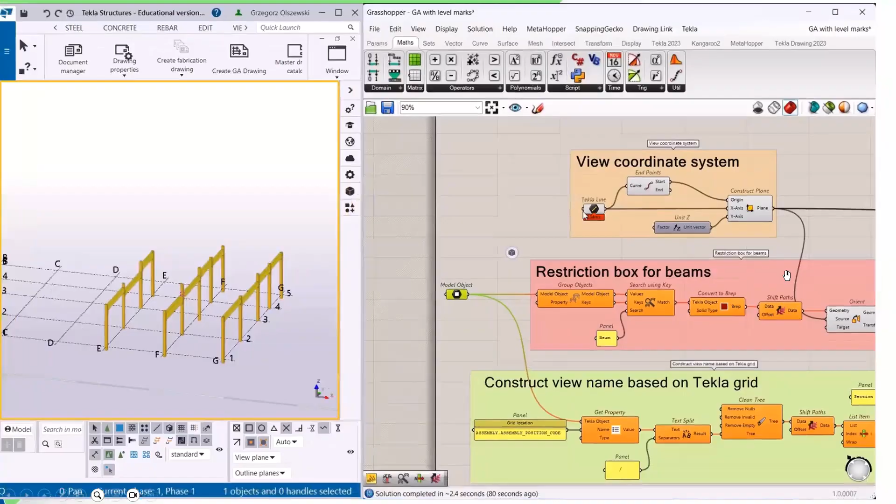Grasshopper is visual programming. When you think about programming, maybe you've heard of Python or C#. In text-based programming, you write text, your functions, and you can automate things. With visual programming, and Grasshopper is one such language, you use blocks. On the right side you can see these blocks, which are components, created by someone else, so you don't have to write anything in Grasshopper. What you can and should do is connect components to other components.

Some components have inputs. For example, at the top you connect the Tekla line, and next you connect a component called Endpoints. By connecting that you get start and end points. If you'd like to construct a plane, same as in Tekla, you connect an origin, an x-axis, and a y-axis. This is visual programming: step by step, through geometry, you create and automate, in this case, your drawing.

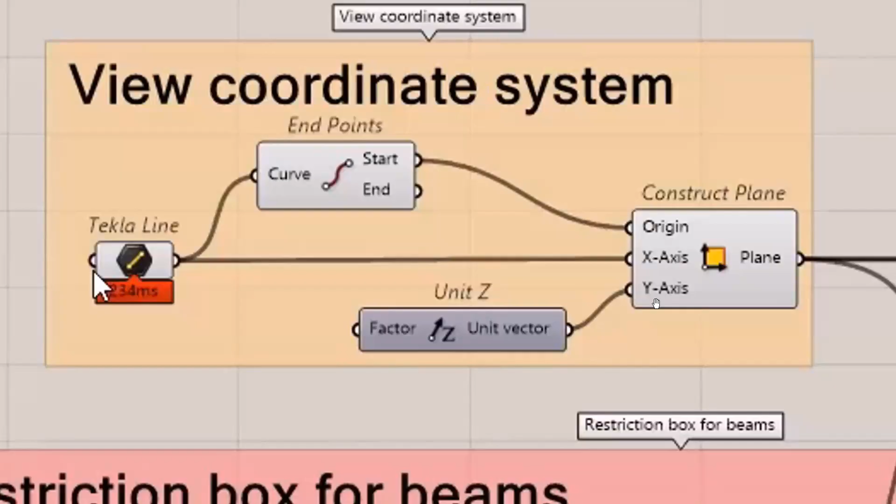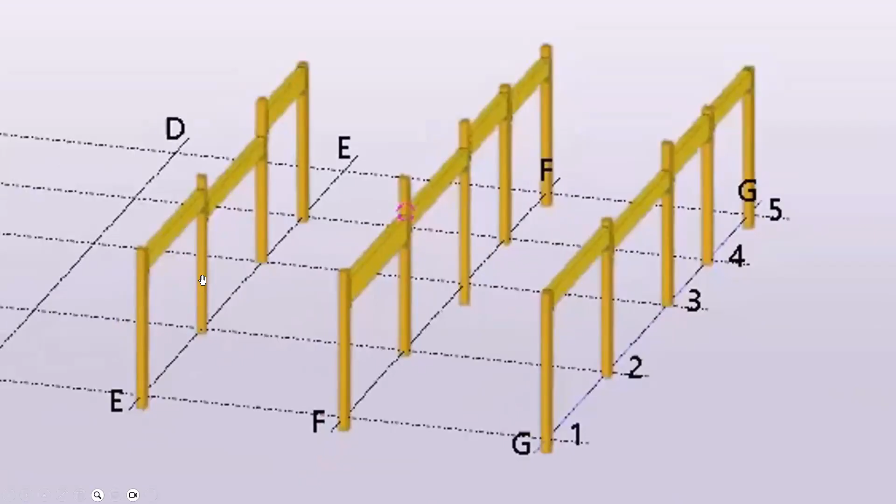Let's say we would like to automate production of drawings, like a cross-section view of every single frame. In this frame we have some beams and columns, so let's create 3 cross-sections. I've created a script here: from the script we set multiple model objects, choosing objects we'd like to include on our drawing, and nothing complicated, our drawing just pops up.

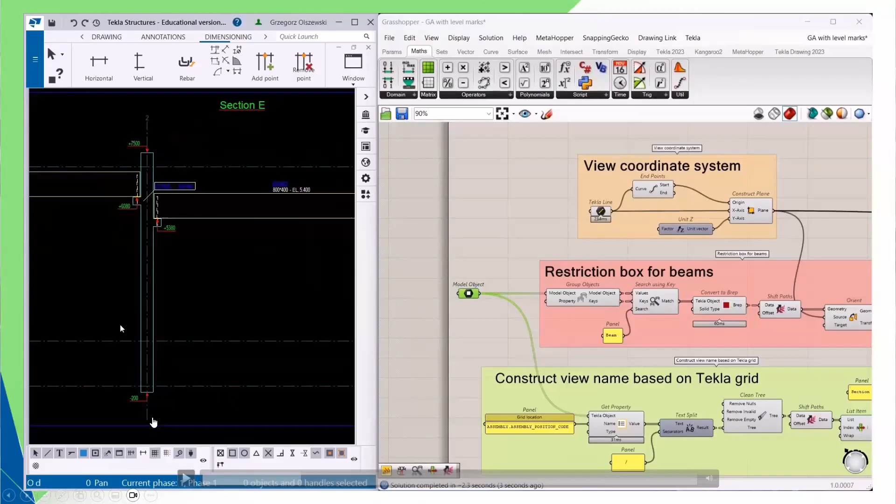In addition to the standard automation of our cross-section view, we've also introduced top marks on the column, our console, and bottom marks. We also make standard names for the elements. On the right side you can see Grasshopper and Tekla connected, as if open together, there's already a link.

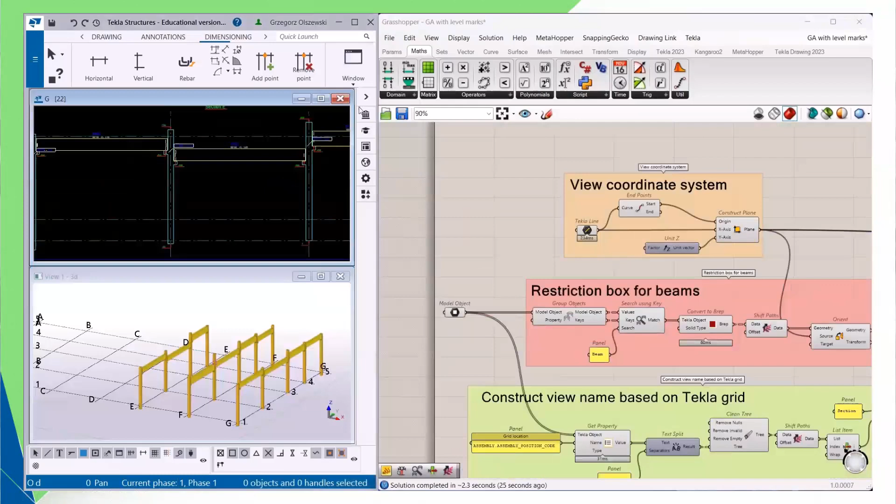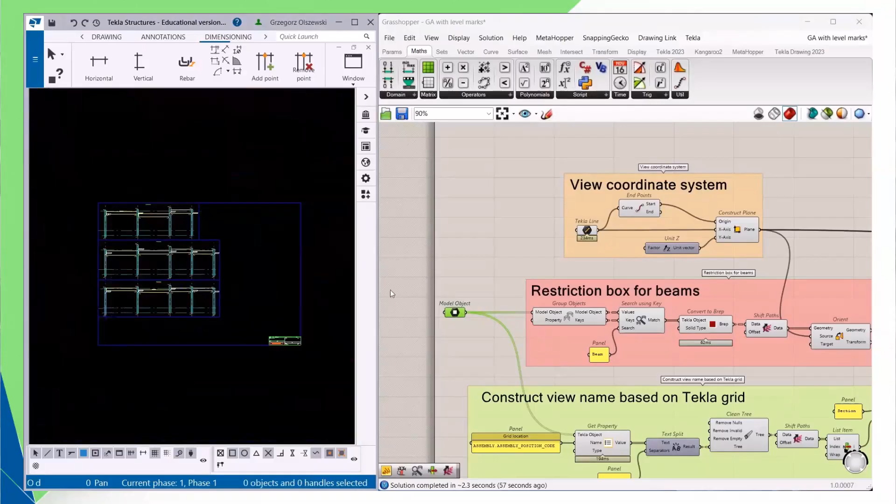What's best is that we can reuse this script, and this is what's great about Grasshopper. We can just select our second frame and the same automation comes: we get the section of the drawing, but also all the top marks automatically, all the names, and we can also make more things like dimensions.

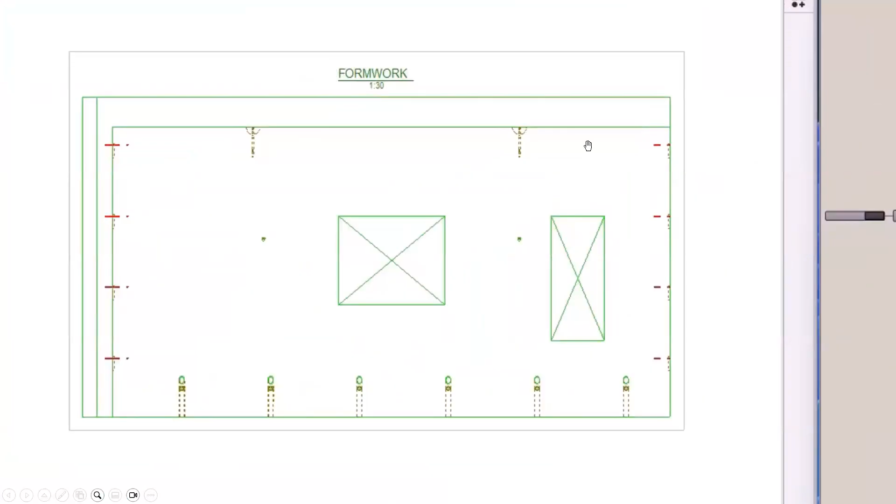Speaking of dimensions, when I worked at Consolis in Norway, a prefab company delivering prefab elements, we did a lot of this kind of drawing, and it was a real nightmare for me. Previously we did everything in AutoCAD, making all the dimension lines manually, all the doors, windows, lifting anchors, anchors on the sides, everything done manually. And in Tekla it's not that great to recognize with the dimensions.

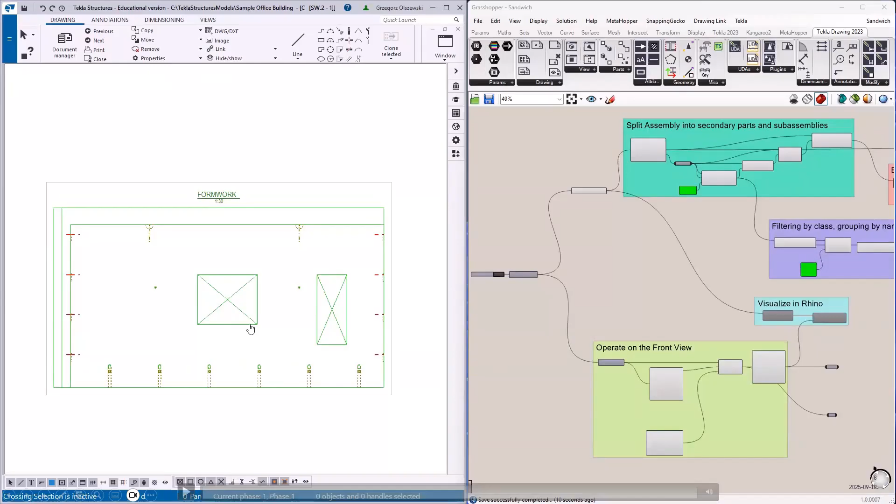For these kinds of objects, you have to do it manually, and you can use Grasshopper for that. On the right side, you can see a Grasshopper script created for sandwich walls. From the script, we can just click play and all the dimensions will pop up, and from the script we can make adjustments.

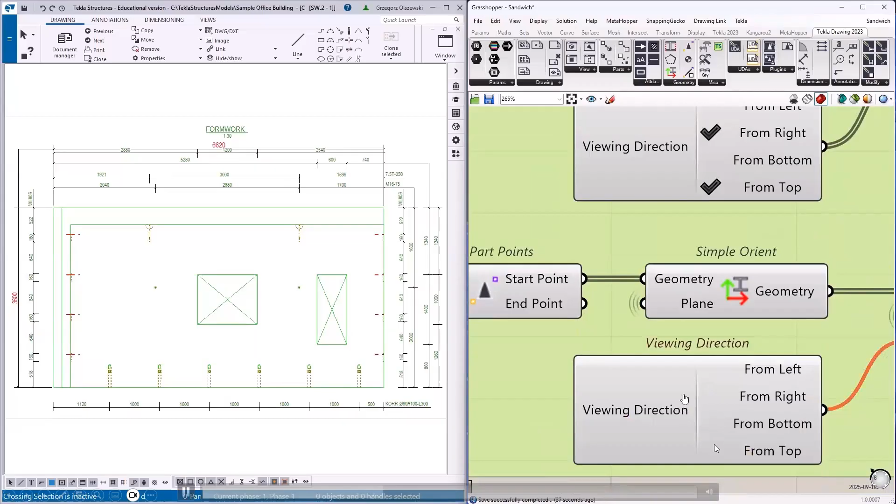So it's not like everything is automatic. For example, if we'd like to merge some lines or delete lines that aren't necessary, we can change that from the script. And the best part is that the script recognizes what we are aiming to do.

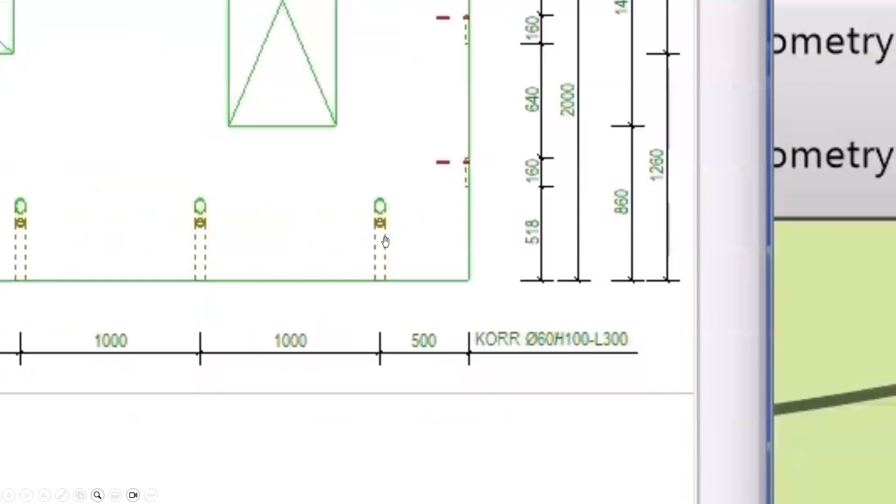For example, here we have some connections, like pipes that we are connecting on the bottom, so it will automatically recognize what the name is. If we have the name correctly as a component used, the Grasshopper script will also recognize the number, how many of them we have.

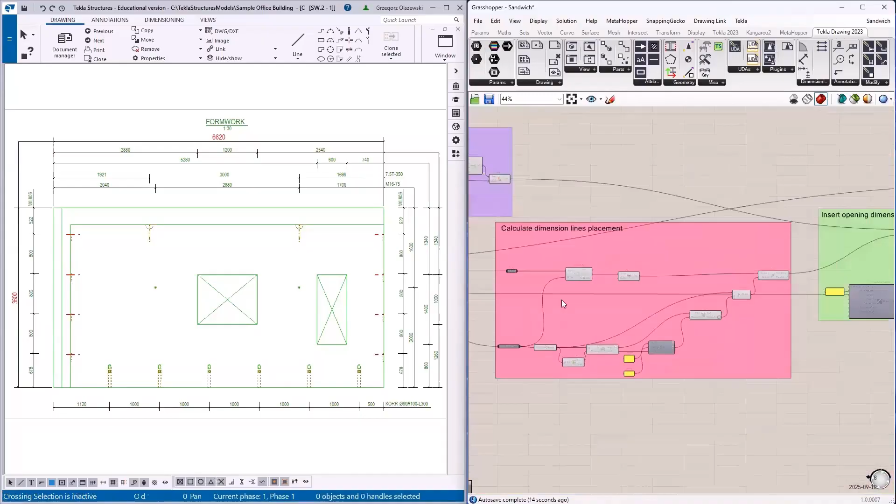This is something like Tekla, but it's not the best comparison, because here we can do all the automation as we wish. The best part is that this script is created by engineers, not someone from IT who is coding without knowing what they're actually doing. Engineers can write the script however they want, and this is the biggest benefit of Grasshopper - the scripts aren't created by IT developers like today. For example, with Tekla Open API, you have to really know C# to do that.

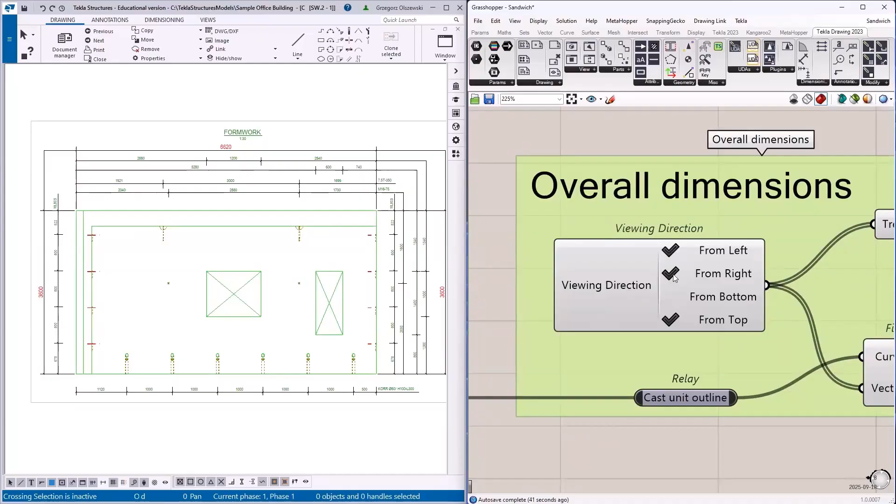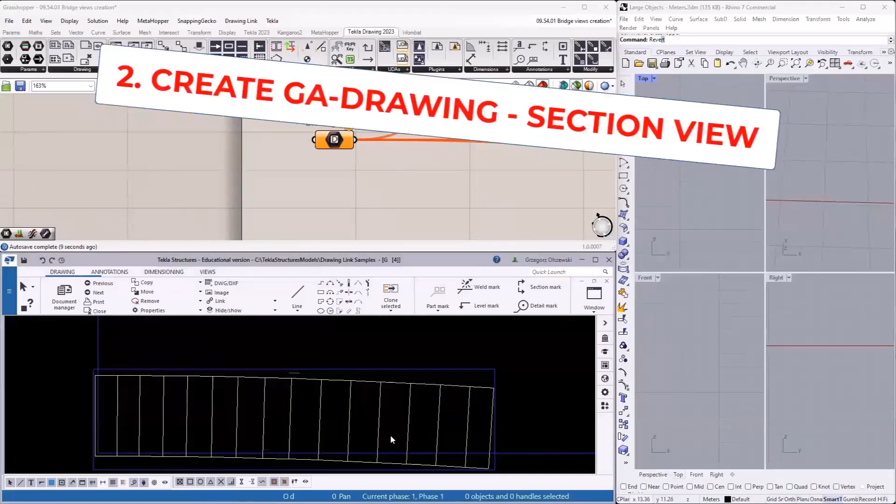More examples for those working with bridges. This kind of work I've done - from this bridge we can create all the sections and create all the drawings in plan view, every single segment. The same can be done to create a section for this bridge.

Now the best part - we can create many cross-sections along that bridge automatically for every single bridge section. Here on the bottom you have them one by one, and then, as in the previous example, we can add all the dimensions. This was a really cool example that we used to automate.

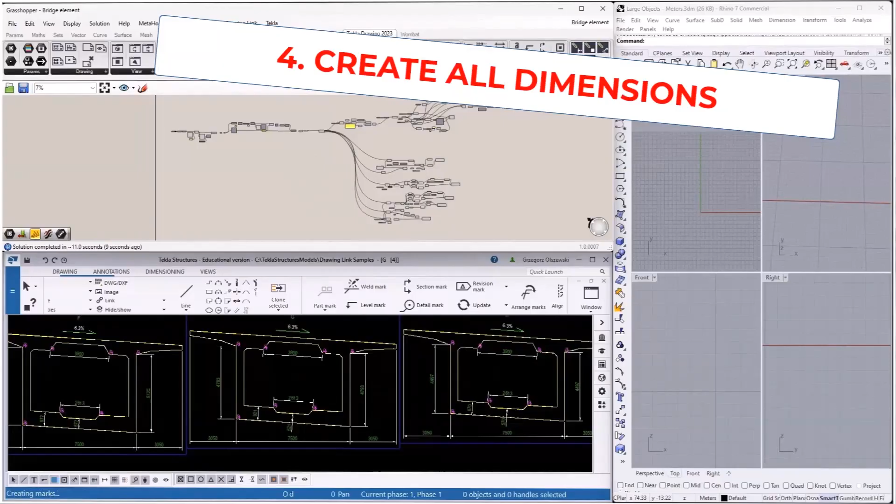The bridge was 634 meters, and we wanted to automate that. If you can imagine, if we make a change in our script, our bridge is going to change and move accordingly, so the script stays connected.

All right, so that's the drawing part. Let's go to quality assurance. This is something I use Grasshopper a lot for - making quality assurance tools. It means making a script that will check the results to see if everything is okay. Let me show you this example using Grasshopper.

In this case we have a 16-floor building, and I wanted to check if every column is on top of each other. There are lots of columns, and I don't want to click through and check manually if this point actually stands on top of another, if the X and Y coordinates are the same. So first, I can sort all the columns by their X, Y position with tolerance, and find stacks that are suspicious.

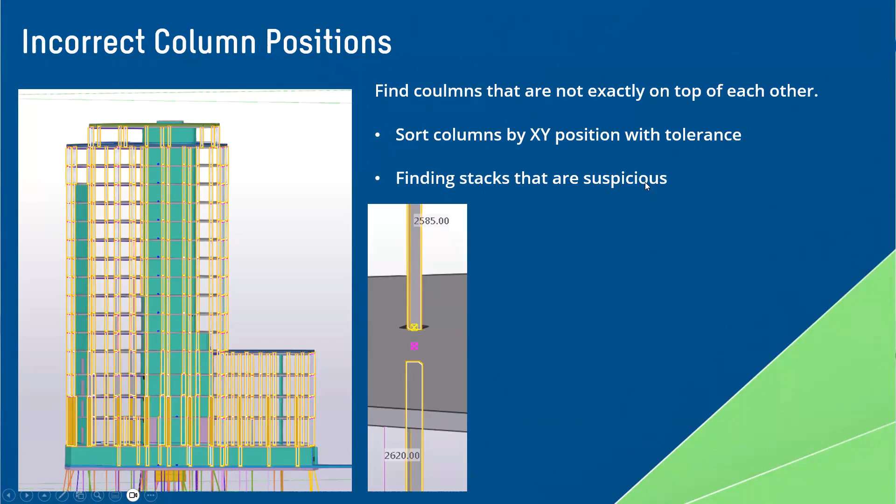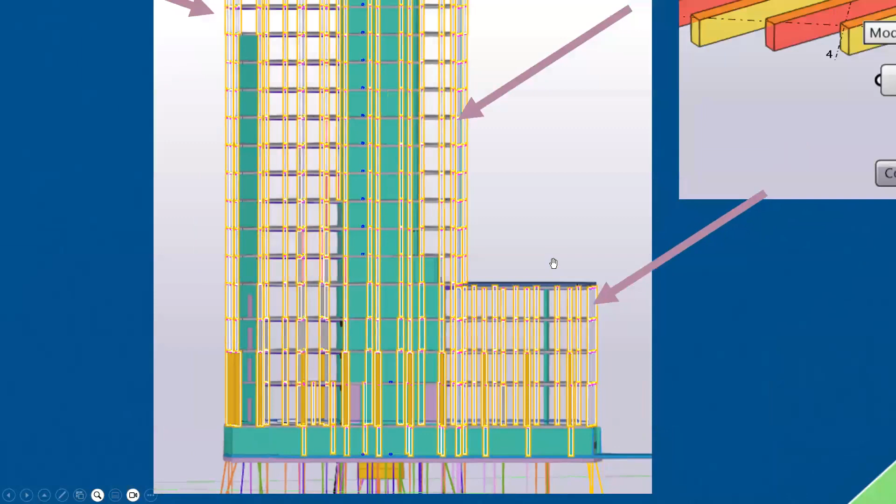I can run the script, which will point things out to me - computers are really great at going through all the information. So I can create a script that works for me. In this case, I set the tolerance to 20 millimeters, and the script showed me that this column, and also this column, are moved more than 20 millimeters. You can point it out in a visual way. This is amazing for quality assurance.

You don't have to just create things through Grasshopper, but you can also check them. It's the same thing with drawings - if you have to check 100 drawings for errors, you can make an automation where a computer with a Grasshopper script can go through all 100 drawings and also make changes.

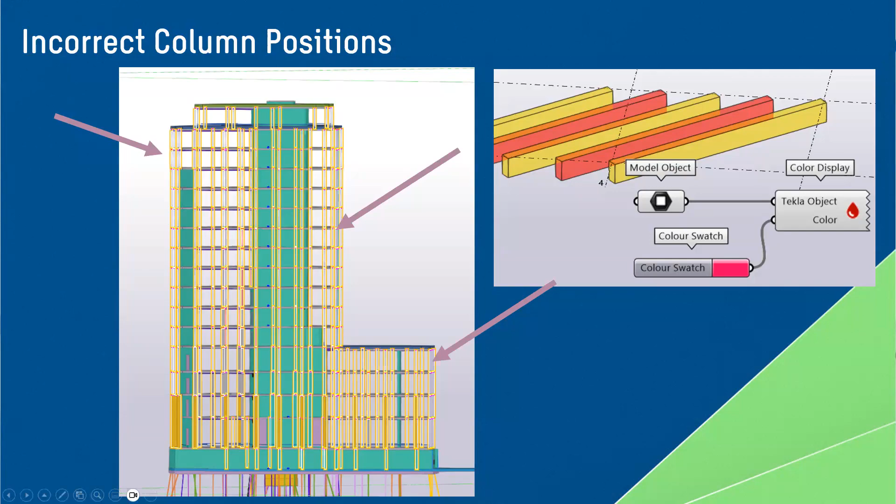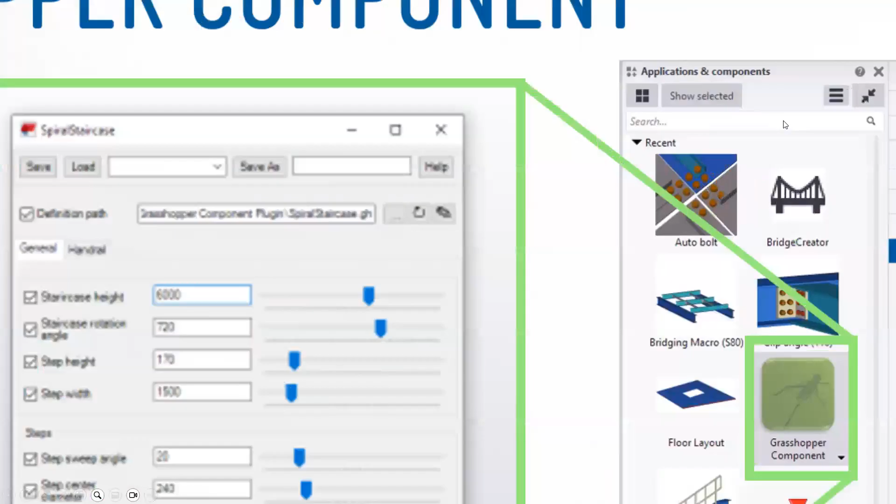Next, you can also create your own components, and this is where Tekla really shines. For those who know Tekla Open API, you can use C#. You can see this black text - you have to really know programming and be a C# developer with Tekla Open API knowledge to make this component, which appears on the right side under applications and components. However, you can also create similar scripts without using C#, just using Grasshopper.

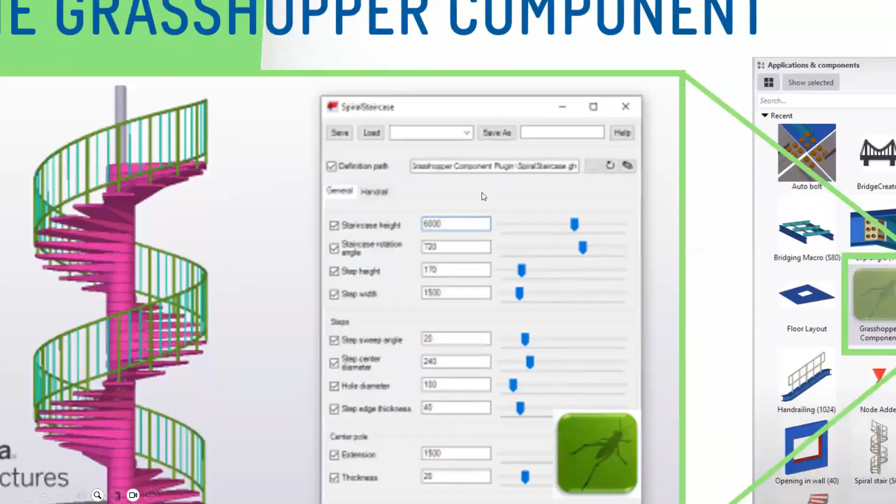You can just right click and create scripts that can be used by your colleagues. Even users who don't know Grasshopper can use your work, because in previous examples I showed you that you have to have Grasshopper and Tekla open at the same time. But here you can just create a Grasshopper component, load it, and you can see this is like a script for creating spiral stairs. So everything is in Grasshopper, but you will not spot any difference if it's C#, Tekla Open API, or Grasshopper.

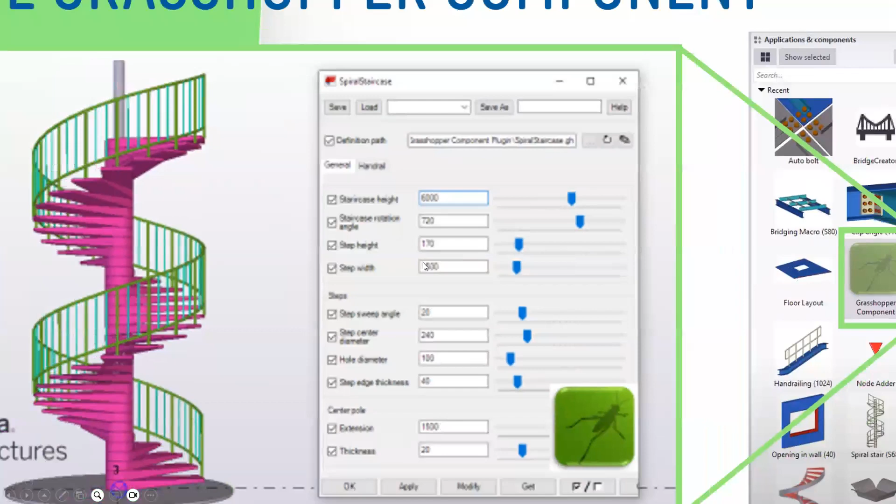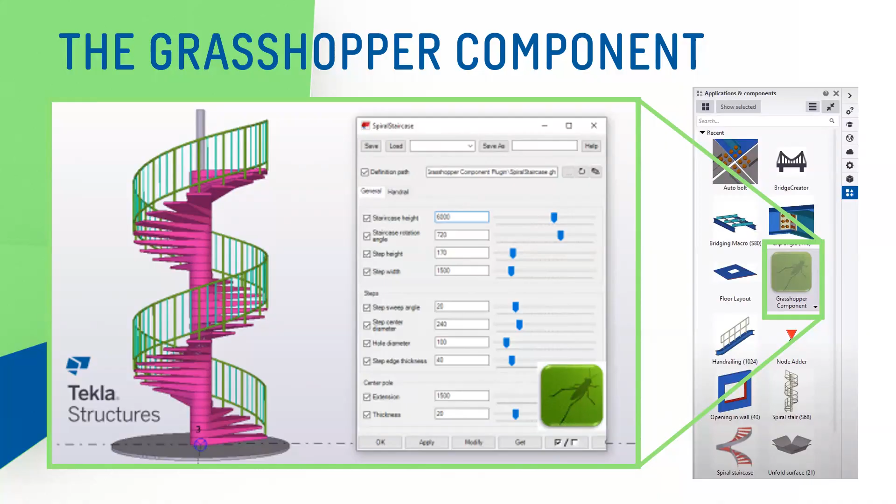The best part is, previously if you would like to make any change, like adding a new parameter or new options, with Grasshopper you can just go to the script, make a quick change, and apply it. With Tekla Open API, if your company doesn't have a developer, you have to send it outside, someone has to check it, and maybe you wait 1-2 months for that. With Grasshopper, you can just check what you would like to add and just post it. This is something the Doka company is doing a lot.

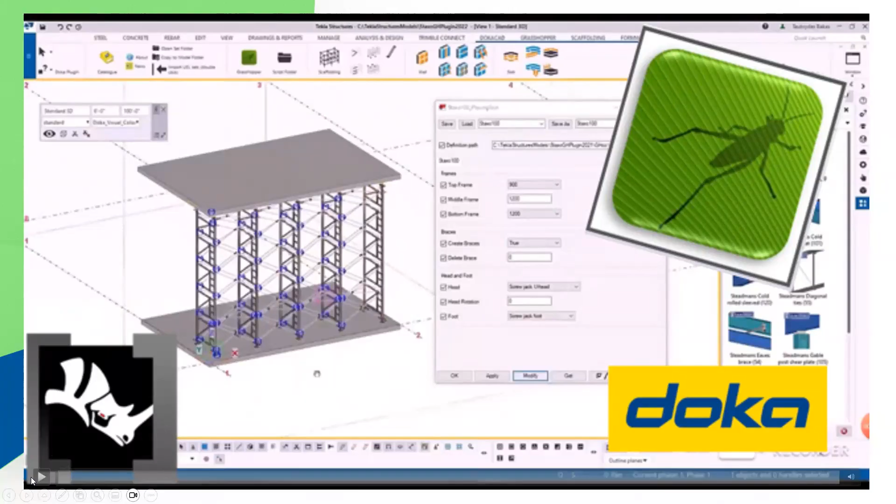For those who don't know, Doka is a company that creates formwork and uses Tekla for that. Doka is now sharing Grasshopper scripts. So for example, if you would like to make a formwork in your Tekla, they are just sharing a Grasshopper script so you can use it and adjust it to your needs. I will show you.

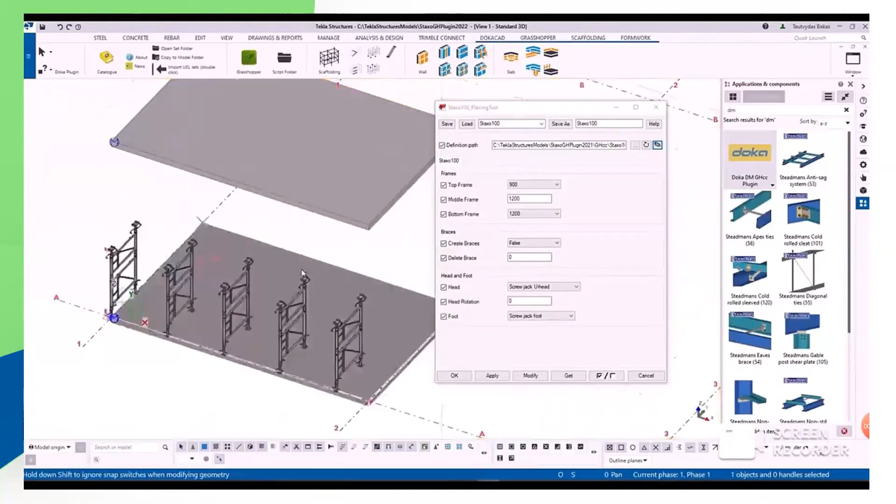Here you can see this is the Grasshopper component, just a normal table. In the background there's a Grasshopper running, but you don't have to even see that. With this component you can create formwork. You can move it with direct shape modification, but also you can make changes in your script, in your dialog, so if you would like to make some changes, you can do that.

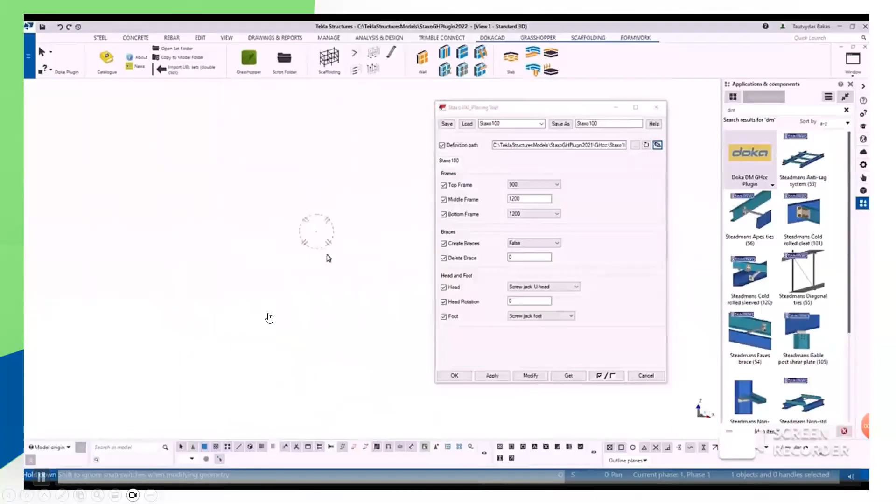In addition, you can see also some text, just a display, and this is something you can do with Grasshopper just to see if everything is correct. This is why I love Grasshopper that much, because it's not only 3D modeling, but also making a kind of visual objects.

With Grasshopper, you can also import and export into finite element software. This is really something which is changing the industry, because Grasshopper has a direct connection with most used finite element software. For example, you can connect Grasshopper to SCIA, Karamba, Dlubal, RFEM, Oasys, SAP2000, ETABS, Sofistik, Idea Statica, which I'm going to show you, Robot Structural Analysis, ConSteel, FEM Design, and much, much more.

If these softwares are connecting with Grasshopper, then these softwares can also talk with Tekla, because Grasshopper can be used as our master model, like a model in the middle, and then we can connect all the softwares.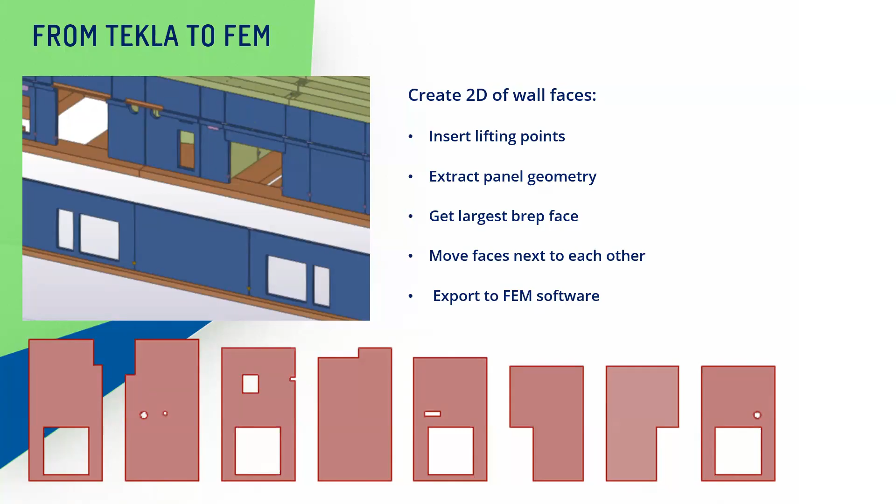I can show you some examples. This is a case study I've been working on. I had many precast walls in my project that I wanted to have. I modeled everything manually in Tekla back in the days, and I wanted to send it to my software to make a calculation. So I wanted to make a 2D drawing for every single wall. I had like 300 walls on my project, and I wanted to make it 2D and export it to finite element software. This is how I did it.

This is my project with many precast walls. First of all, I wanted to check the weight of every single wall and input all the lifting anchors at the top. So I used Grasshopper for that with a component, where you can include all the components that you have, so you can insert them automatically in your elements. The component checks the weight of every single wall and then inserts the lifting points based on the weight.

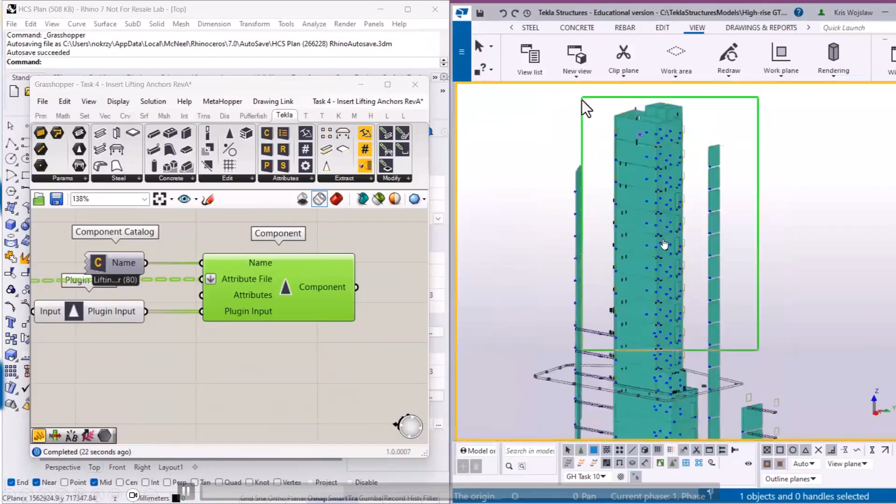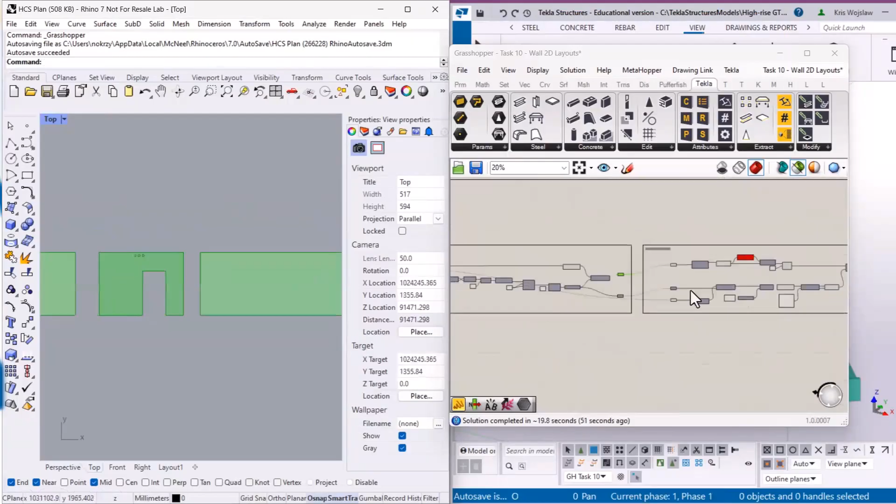Then I would like to take only the faces of my walls and make a projection. You can see I projected all of them kind of in AutoCAD, and one by one I can see all of them. I will insert also the lifting anchors at the top, so you can see at the top there is a point with the lifting anchors, and then I can make an export, in this case to FEM Design, a Swedish company, which I can calculate with, and it's really super fast. And if I made some changes in my walls, I could export everything automatically.

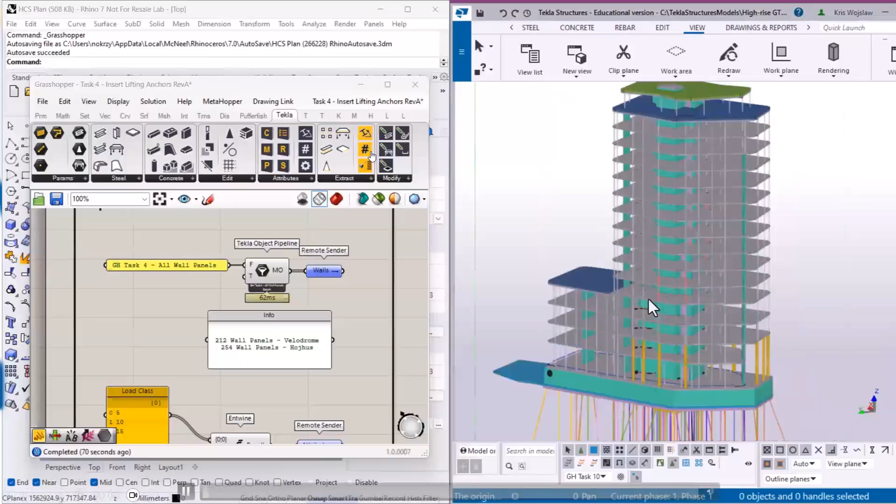More, we have also tested the connection between Grasshopper and Dlubal. Roberta said that some of you are using Dlubal. So you can see we have RFEM on our left side. We have our model in Rhino, and we have Grasshopper. Rhino is more like a 3D visualization, like AutoCAD but really more advanced. Grasshopper is for writing our script, which is components, and Rhino is for visualization.

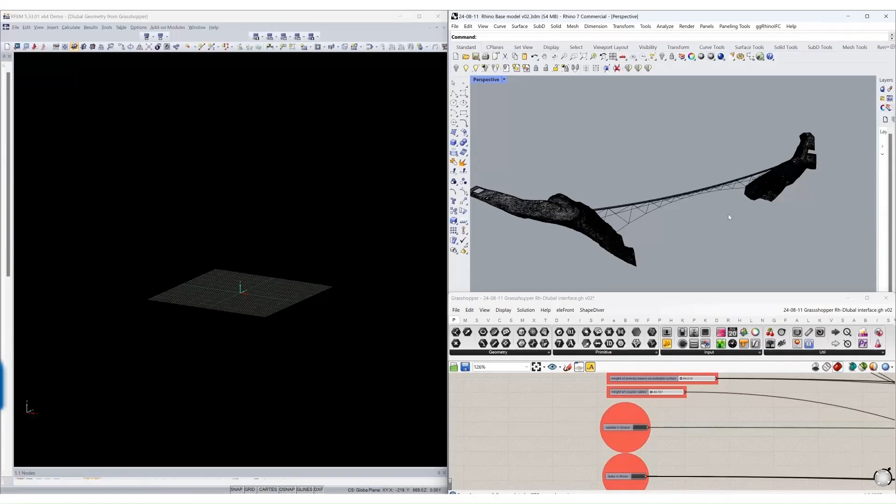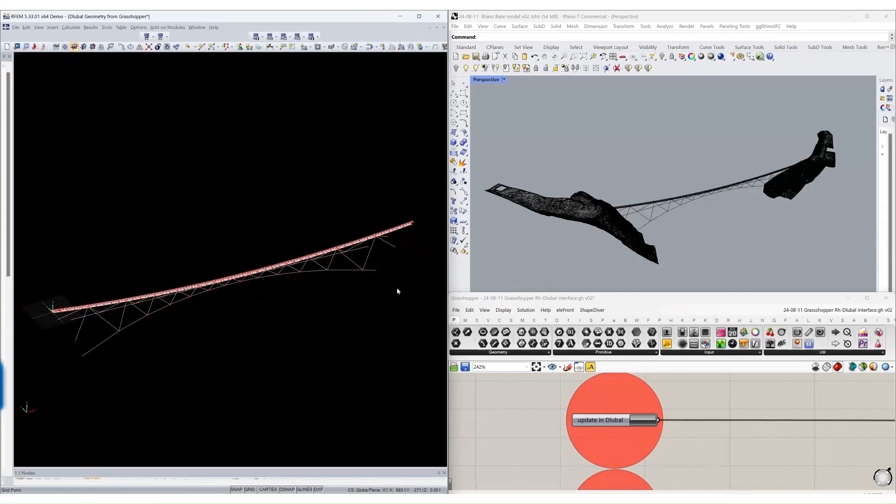So you can see that on the left side, we have our bridge. We can also send this information about our bridge from Grasshopper into Dlubal. All the geometry which we can create we can just send directly to Dlubal, so we don't have to make these tools. I know that Dlubal is maybe not the best one, especially with complicated things, and Grasshopper is really great, especially with complicated structures.

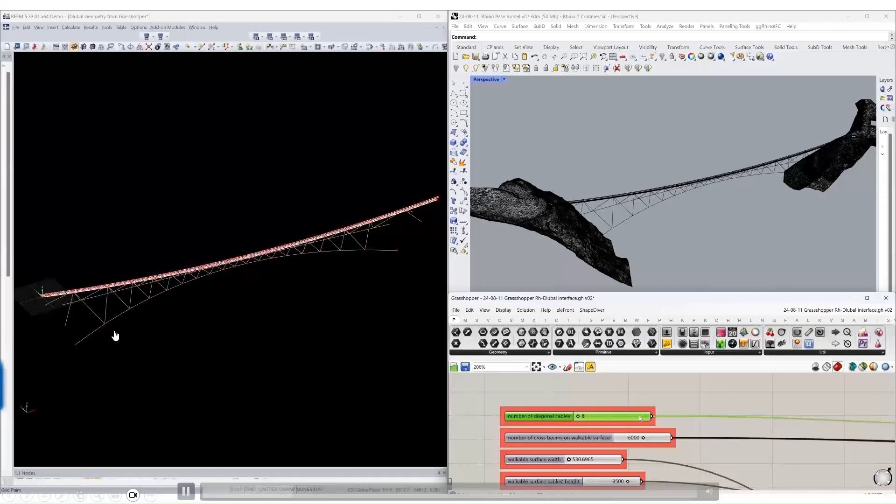For example, if you would like to change the number of truss systems, you can just click the button. For example, make 20 of the connections, and then change this back to 8. You just click the update button, and you will see that we have 8. It's really great for optimization. Every time you would like to make a change, for example here on the grids, you can just update and all the information will be sent.

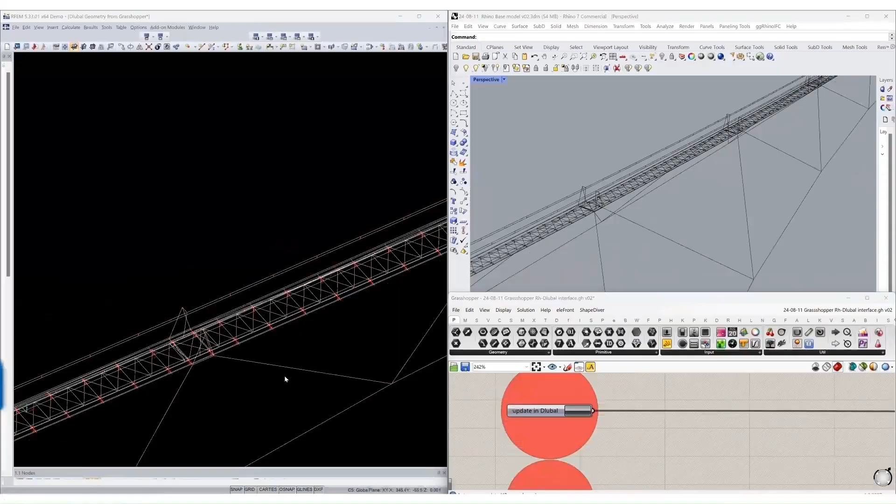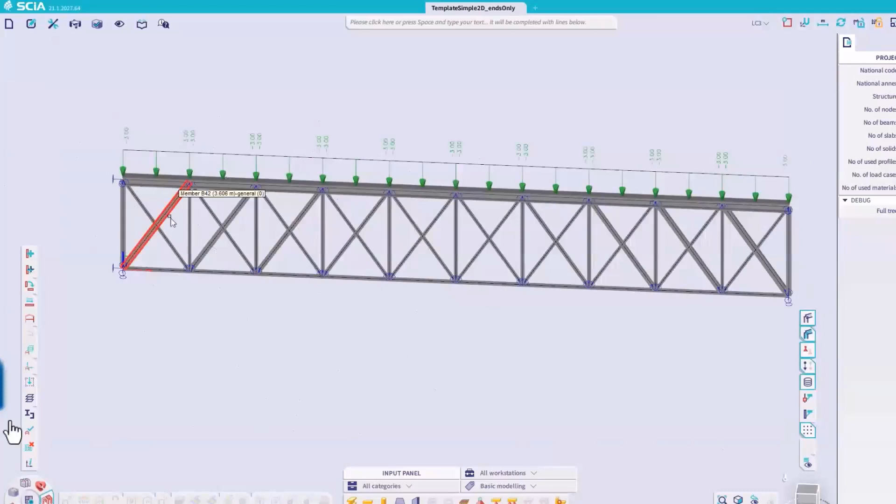So this is the same kind of way that I showed you with Tekla, but now you can also connect with Grasshopper with a similar script that we had in Tekla. You can also connect into different software. The same thing can be done with IDEA StatiCa. Here, for those who are working with steel, we are exporting from SCIA Engineer. We have calculated this truss system, and then we would like to take all the forces from this calculation and send them directly to IDEA StatiCa.

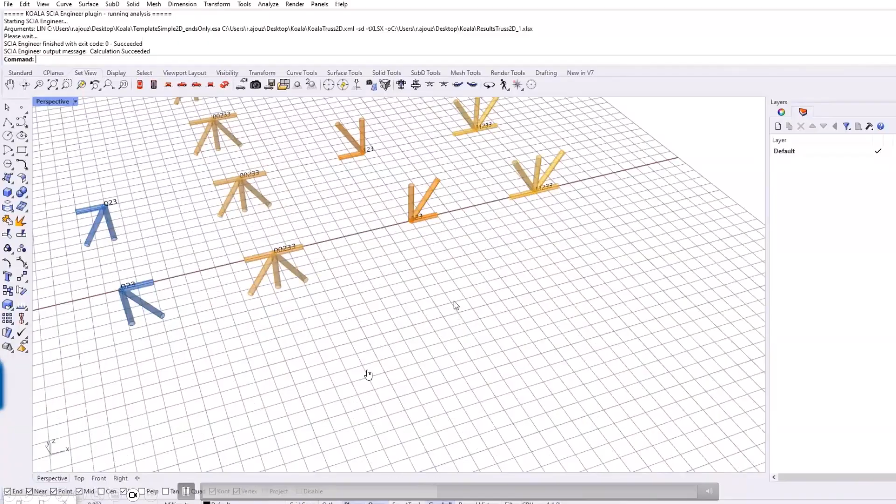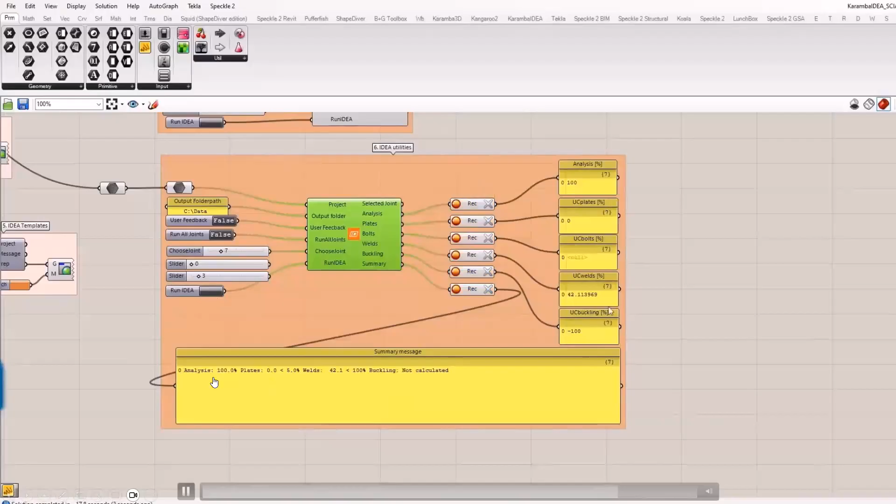You can see with Grasshopper, I could position all my joints. There are all different types of joints, and we can use Grasshopper to export them to IDEA StatiCa. So from SCIA Engineer to Grasshopper, and from Grasshopper to IDEA StatiCa. It's kind of a link. First we choose which one we would like to export. We went through analysis in SCIA Engineer, and then we go to IDEA StatiCa to calculate that. And we can take information from IDEA StatiCa, for example about the forces and the cross-section size, and change that.

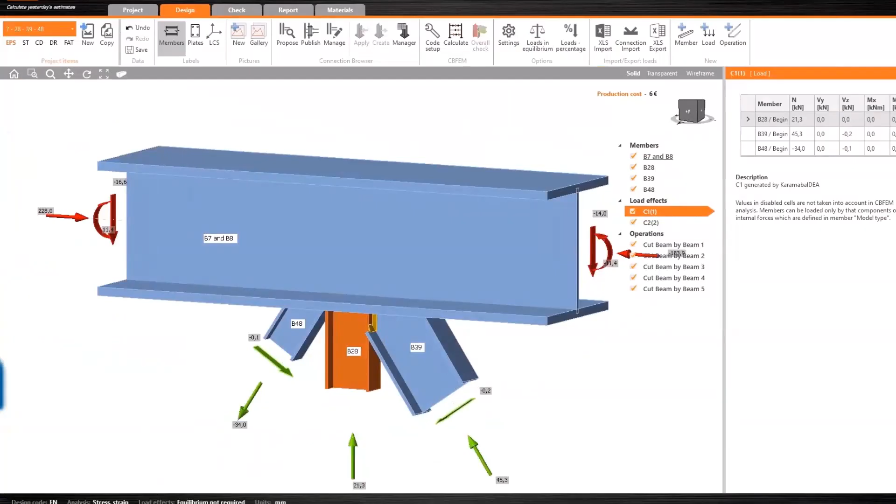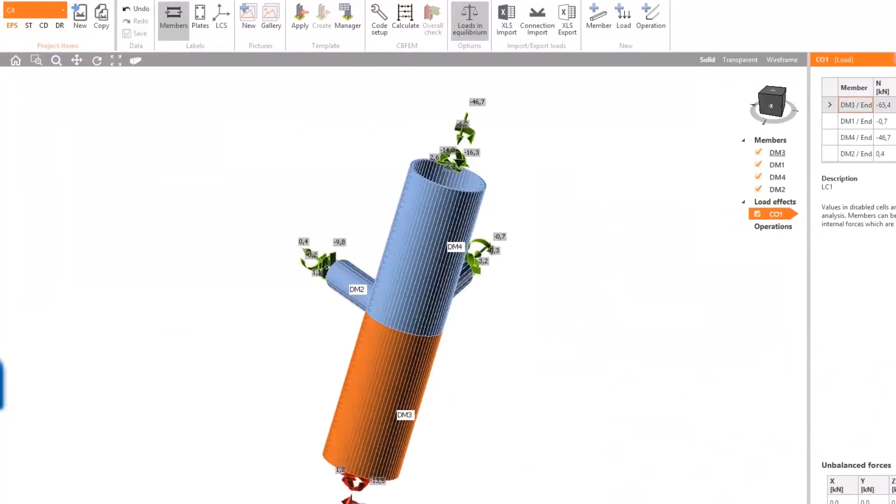On top of that, we can also connect that with Tekla, because we have this link and we can create components based on the IDEA StatiCa output. So there is no need for manual inputting. You can finally connect all your designs. The same here with this tower. We would like to export from analysis and choose the connection to send to IDEA StatiCa. A new file will be created. We can open this new file with the joint, make corrections, maybe change the size of our elements, and send it to finite element software or to Tekla.

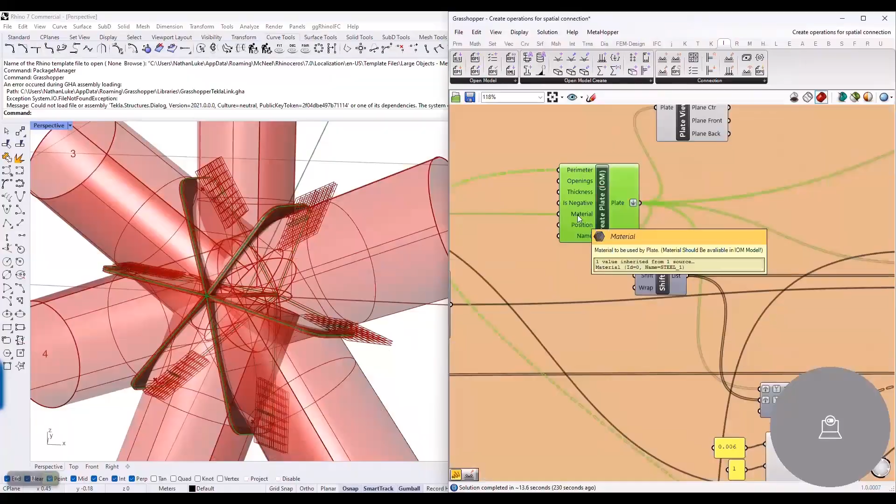Grasshopper is also great for complicated shapes. This is a spatial connection that we had, and as you can imagine, doing that in IDEA StatiCa can be really hard, and Grasshopper can help a lot. To obtain this connection, everything was modeled first in Grasshopper, where we can model all the plates. It's really complicated to do it manually in IDEA StatiCa. So we create all these plates and send them. We can also create the welds exactly how they will be, and then calculate that in IDEA StatiCa. So it's also for difficult connections.

All right, so we went through drawing automation, quality assurance, creating own components, exporting and importing to finite element software. Let's go to user-defined attributes. This is what we use Grasshopper for a lot, since we have more and more BIM projects where we have to fill out all the information, and it's really a pain to do it manually. For example, I will show you one case study. Coming back to this project, I had many columns, and the client wanted information about the columns.

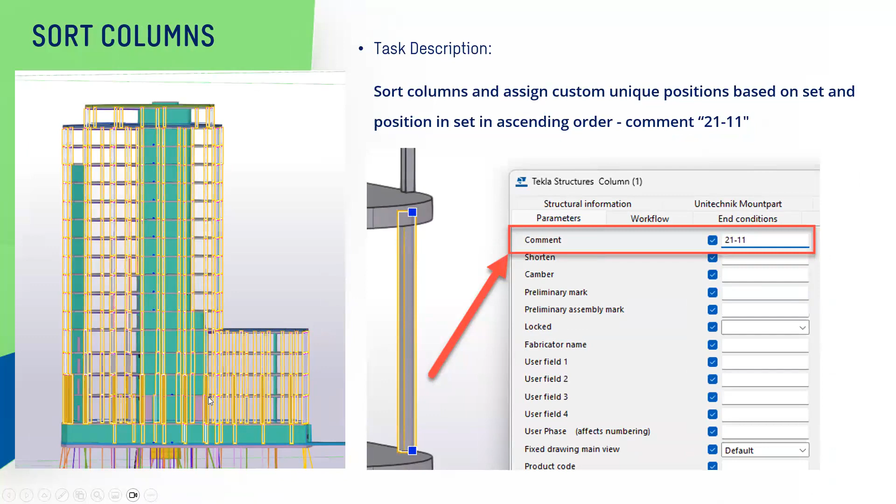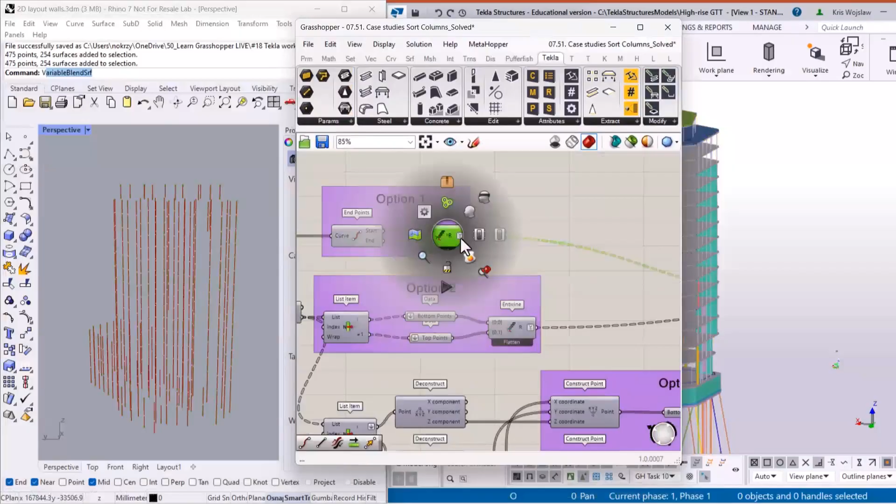So I created a script that in just 2 seconds gives all the names to all the columns based on my script. I'm going to show you how it can be done. So again, on the right side, we have Tekla. On the left side, we have Grasshopper. And in Grasshopper, we can select all the columns, getting this information to Grasshopper. And then based on the script, we can find which floor it is, and then automatically give the information.

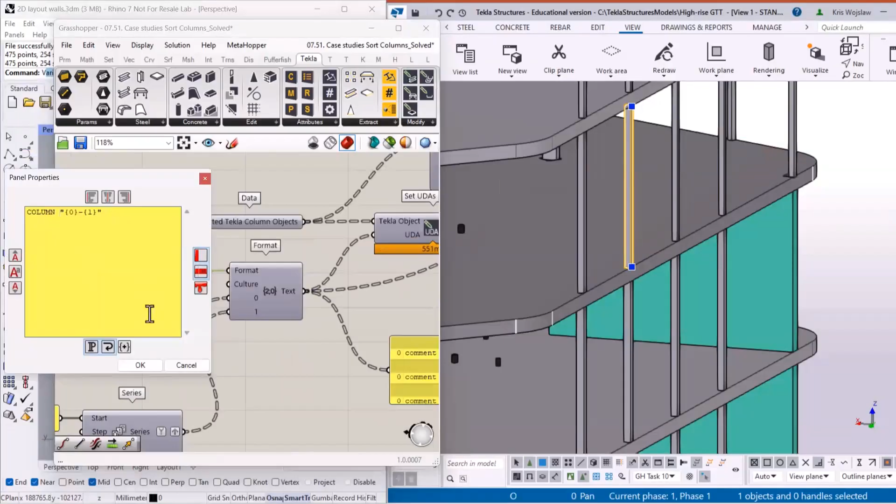So in this script, you can see that we are finding a floor, so 42, 14, number 13, 14, and so on. So it's a level. And the best part, we can also make this comment visual. And this is what Tekla cannot do as a standard tool. So as our check, let's say that we would like to check if everything is correct on our Tekla model, if information is correct in this column. So we can just display this value.

So this is some kind of temporary. This is not an object. You can just check it and you can display all the information that you have in Tekla. You just have to make it in a clear way. And you can do it with the material. You can do it with dimensions, with some revision, everything which is included in the Tekla interface, you can make it visual. And this helped me a lot to deliver better projects.

So I can check my information, what is inside elements. So I don't have to click through thousands of columns and check if everything is correct. Of course, you can use Organizer and see one by one, but I don't know how you like Organizer. It's not, in my opinion, the best tool. And I really like this clear, visual way to see all my information.

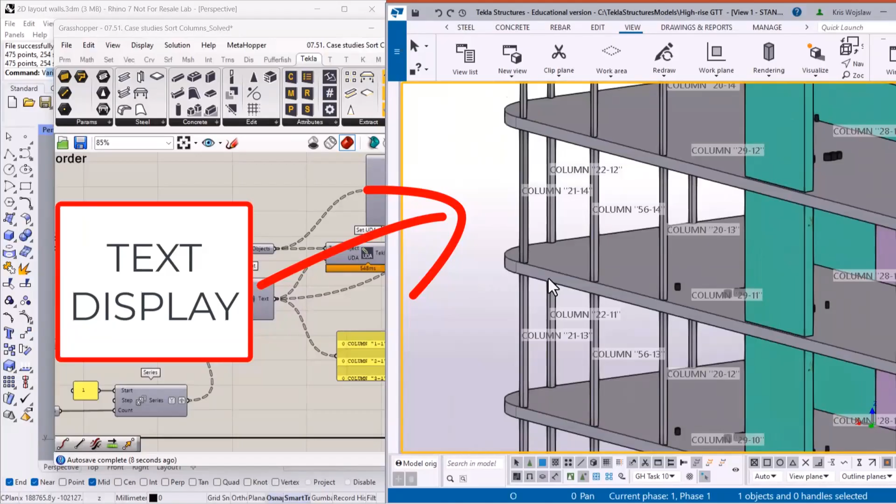Also, what we can do is we can give user defined attributes through Excel, and Grasshopper also can do that. So for example, for those who are working with reinforcement, there is lots of information that you have to give to your elements. And this is just a print screen from one of my projects. So in this project, I used Excel to define all my reinforcement. So let's say that I have a foundation with my standard reinforcement.

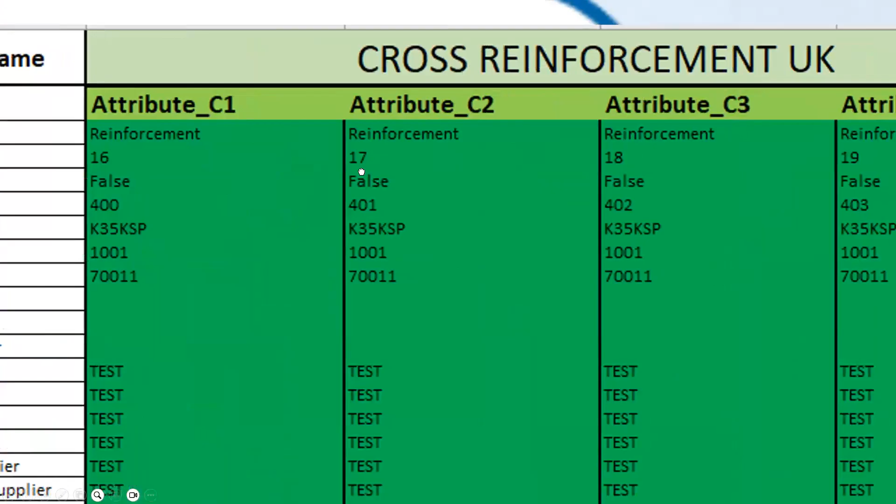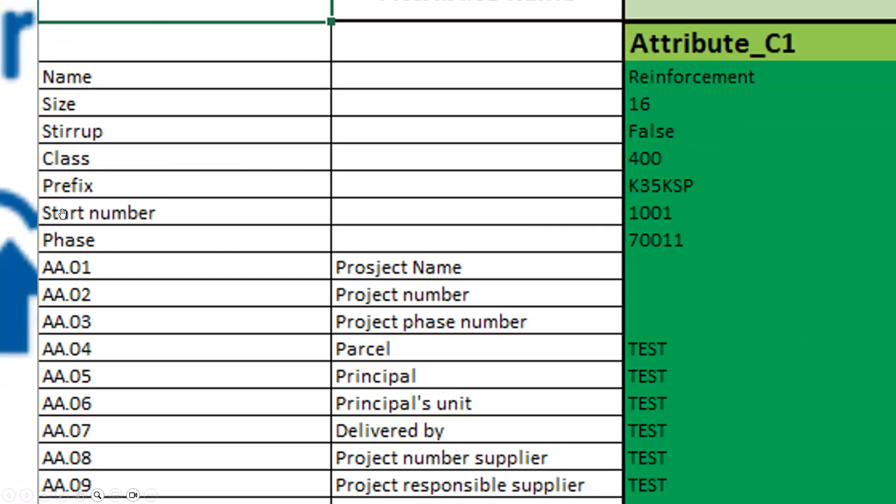And in our table, I defined my first reinforcement, which is called reinforcement. Let's see, the size is 16. Is it stirrup, false or true? What is the class? What is the prefix number? What is the start number, what is the phase, and you can just fill out all the information that you have in this project. And with just one click, you can put all the information to the correct rebar. So you can model this rebar and then use this to set up all your user-defined attributes. And this is a really cool way to have a really clear model.

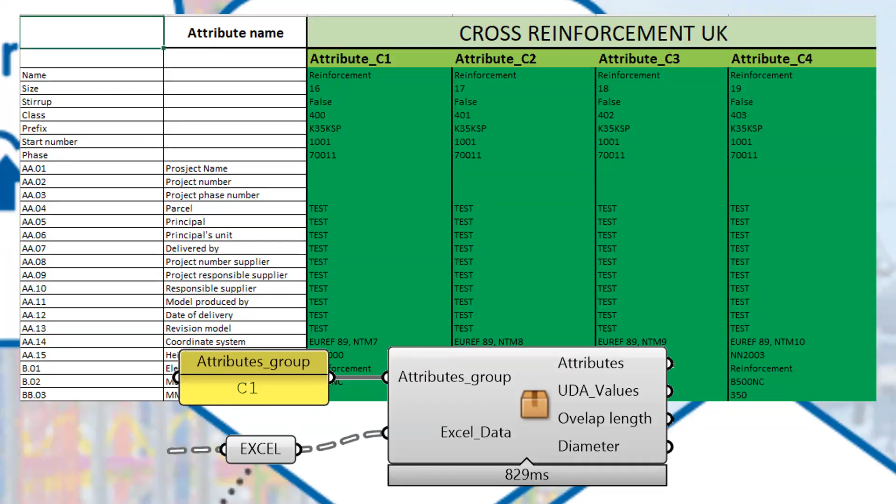I see that some companies are defining every single attribute that we have in Tekla in Excel. They said that it's easier to change all the attributes and have this model in Excel with all these attributes and just send them to objects. So I really recommend using that way as well.

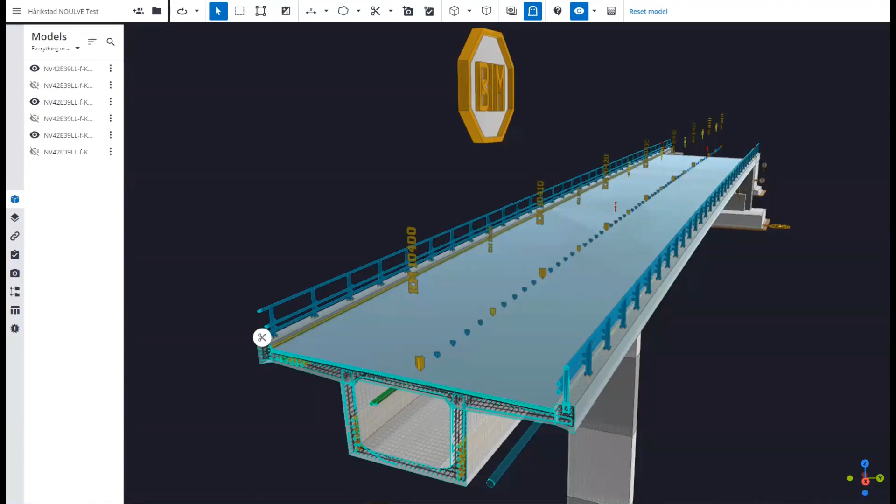In Norway, there are more and more projects based on just the 3D model, and there are new ways to include drawings in our 3D model. So in this case, the contractor wants to have extra information about our bridge structure. So we generated with Grasshopper some 2D projection, so you can see some elements. Just to visualize, to show the client what is the height of this bridge deck inside, what is the thickness of the wall.

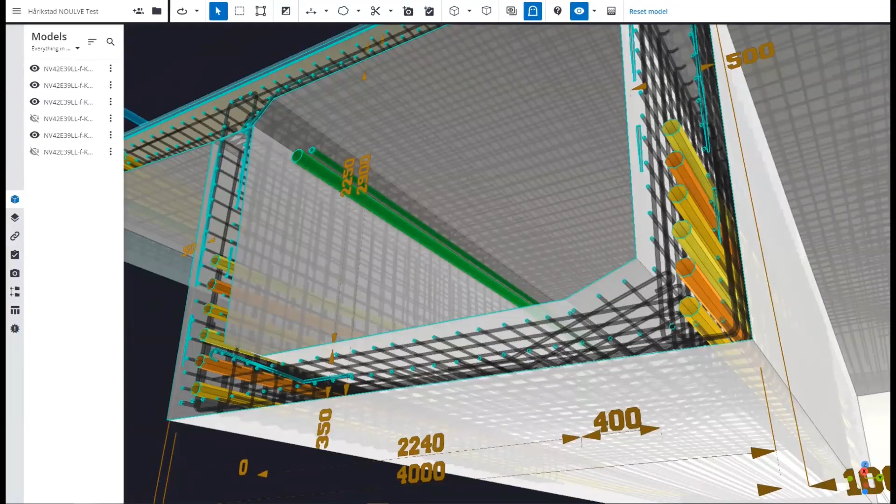You can normally check this information in, let's say, an IFC viewer and just measure the dimension. But here, the client wanted us to deliver it as a separate IFC, and this is what we did. So we delivered a Grasshopper script that generates this IFC file. And this is what we can also do for visualizing the data.

So in this case, in these bridges, we have the kilometers. So you can see that every single meter, we have some markers, so the contractor can really easily take the cross section every single meter. It's really nice stuff. And also showing the kilometers.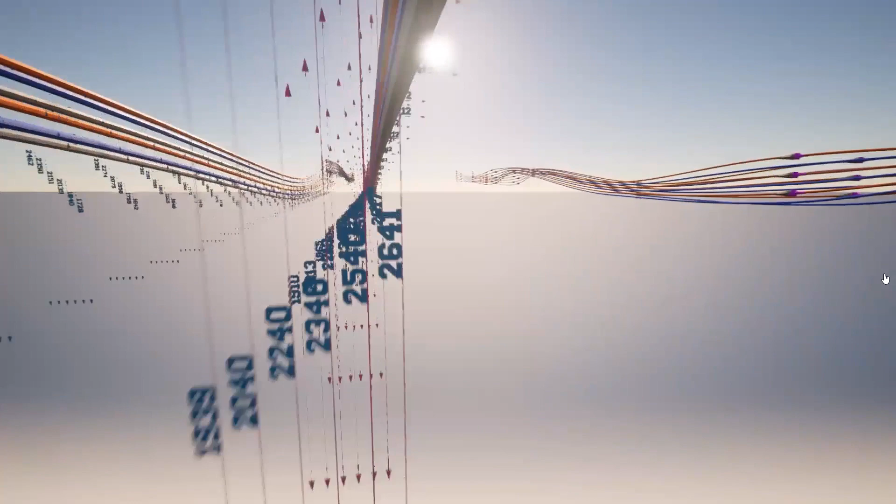So you can see this kind of table that we have showing the width and the height and the length of our bridge in the 3D world now. But also in this case, we wanted to check the quality of our pre-stressing cables. So with Grasshopper, we could make thousands of dimensions just to check visually if everything is correct. We could check that with some of the calculation tools and check the values if everything is okay.

It's not used for building these pre-stressing cables, because all the information is already in the 3D model, but we use that to make it visual and also to check the quality of these pipes.

And the last example that I would like to show you is how we can use artificial intelligence in Tekla. Of course, it's one of the hottest topics in our industry, and everyone is asking, Kris, can we use artificial intelligence in our Tekla model? And the answer is yes, of course, you can do that. ChatGPT or Gemini or other language models are really great to write our Python scripts.

And this Python script can be written also in Grasshopper. In addition to its own components, in Grasshopper you can also write text in Python or in C#, and you can create your own components and create your scripts. So in this case, I wanted to create a script that will check what is the difference between all the rebars. Actually, it's a real case study which I got from a contractor.

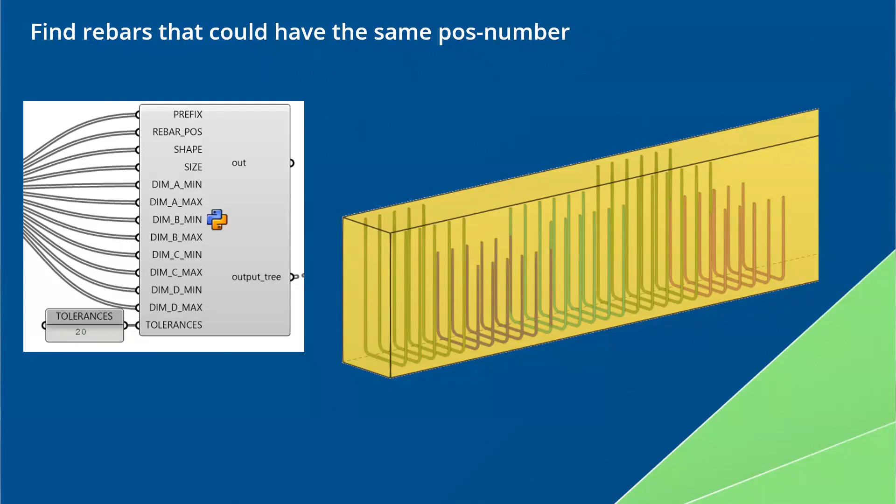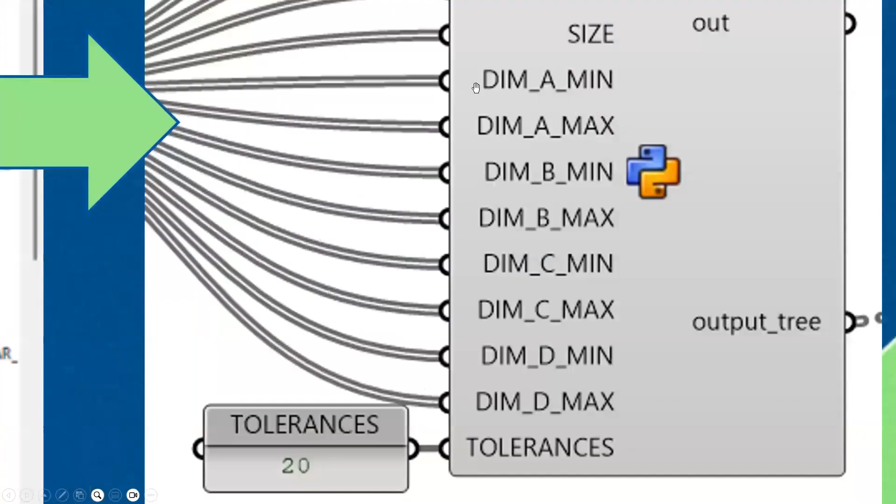And I was thinking, it was a huge project, how can I go through all this reinforcement and check what is the difference? So what I did, in ChatGPT, I wrote my problem. I said, okay, please write a script that will compare the prefix, the position number, the shape, the size, and also all the dimensions. You can see that here is a tolerance, so I put 20 millimeter tolerance. So if all the dimensions of the legs are similar but they have different numbers, please highlight them and merge them together into an average distance.

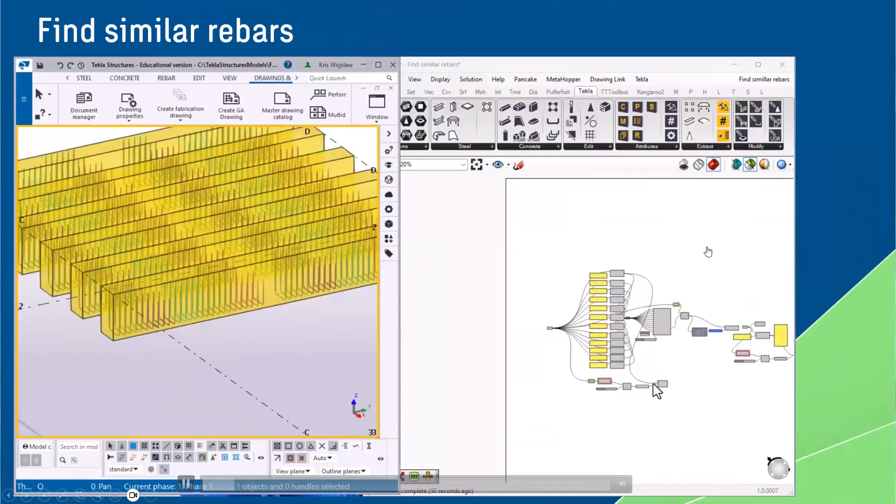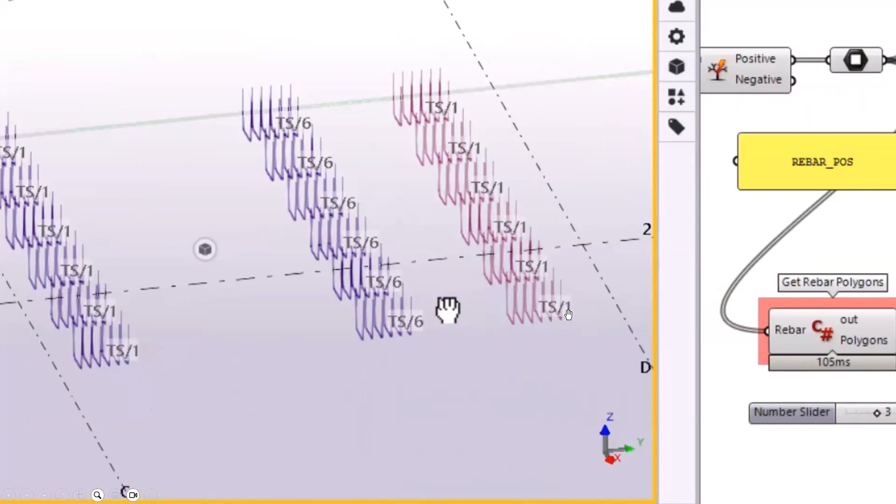So this is how the script worked. Most of the script was written by ChatGPT. So you can see, first of all, I'm just showing the numbers of our rebars, and then grouping some of them which are similar. Okay, so now I'm showing some of the rebars that are similar. In this case, these bars, the first one is called TS1, the next one TS6, and the last one TS1. So this is something that could be merged.

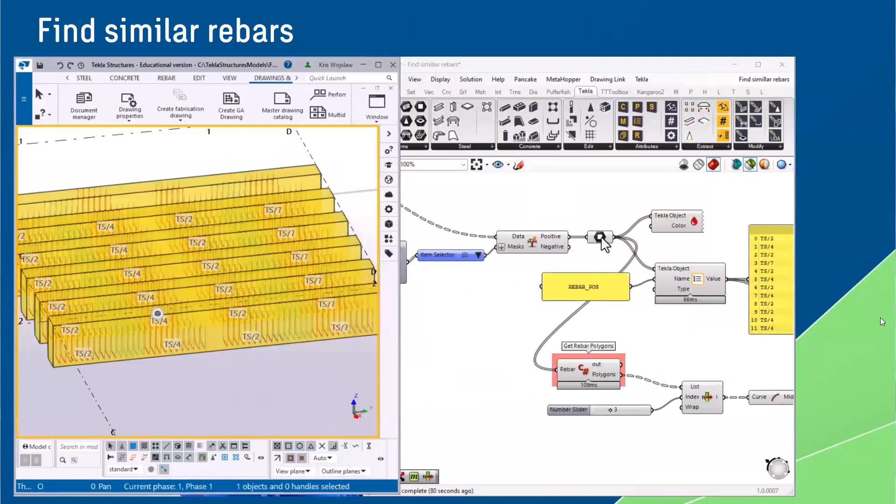So Grasshopper went through all the rebars, found similar ones, and now I can compare them and automatically make them similar. In the same way, I can also find another group. So I'm just choosing find another group, and I'm going to show only selected. It's a group TS2, TS4, TS2, and TS7. So all these groups could have the same number.

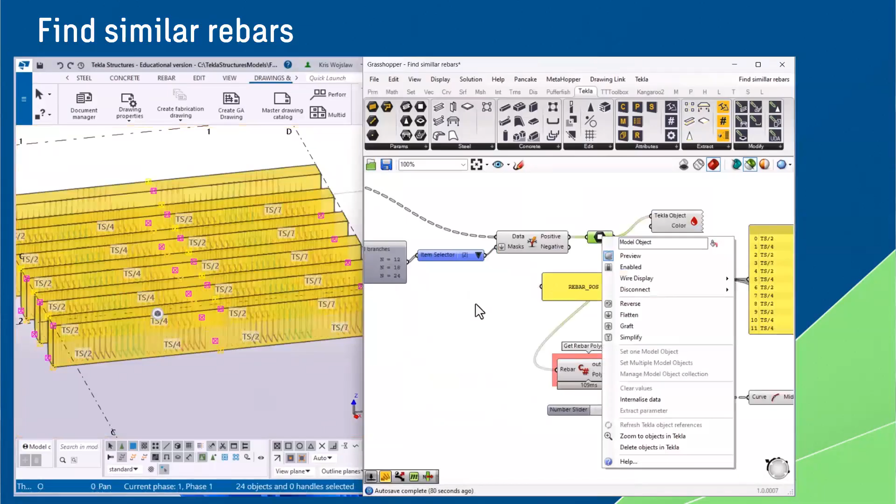In the same way, I can just select them with Grasshopper and adjust the length, which I really love. And the thing is that if you are blocked, you can just go to ChatGPT and ask it to write your own components. So this helps a lot. All right, so those were all the 7 practical applications and Grasshopper scripts that I wanted to share.

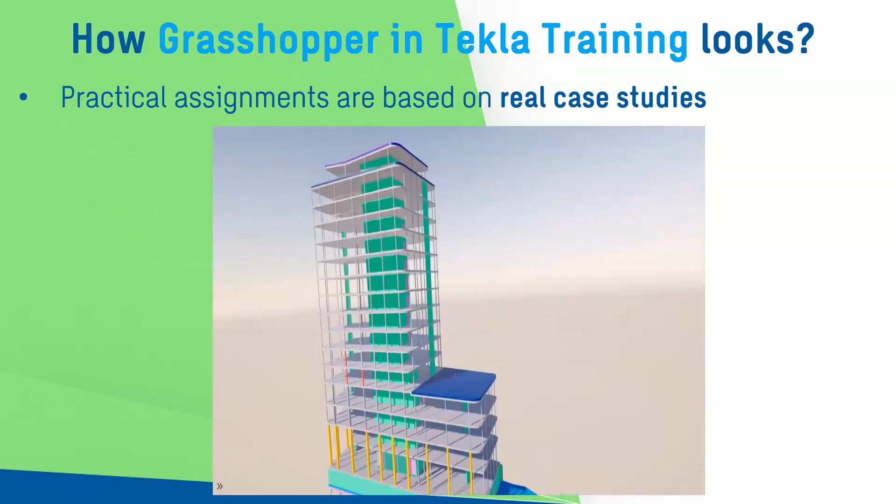So all examples that I showed you are included in the training. So we share it as a package. I was really happy to get this project that actually was my project from my work, like this building, like this velodrome with prefab elements, and also bridge. So we are showing everything on the real structures.

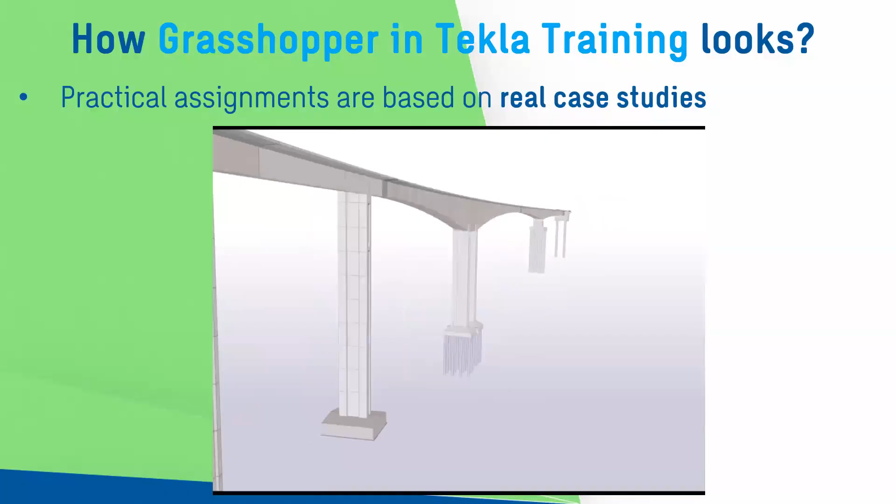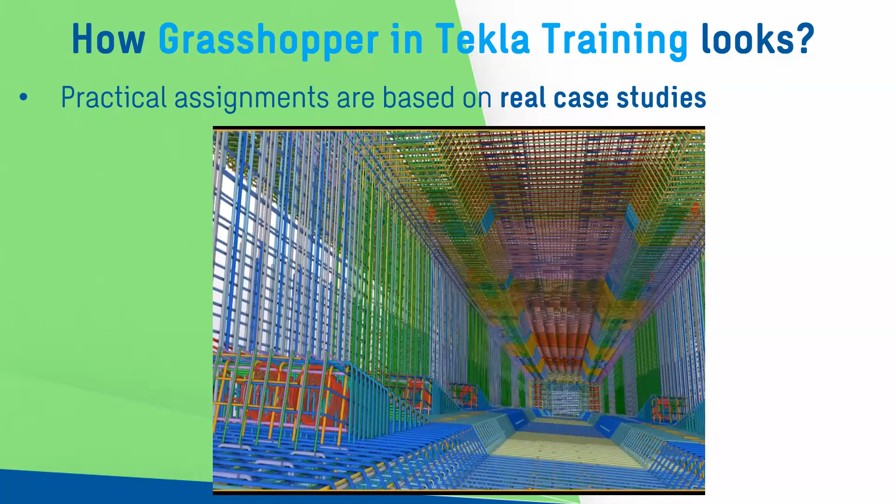So this is Randselva Bridge, which I was one of the designers of, where Grasshopper was used a lot. And we are sharing the parts of the scripts from all these projects, how we can use it in practice. So it's not something imaginary, like, okay, you can make a script, but it will not be useful for your work. Here, we are really focusing on the practical case studies.

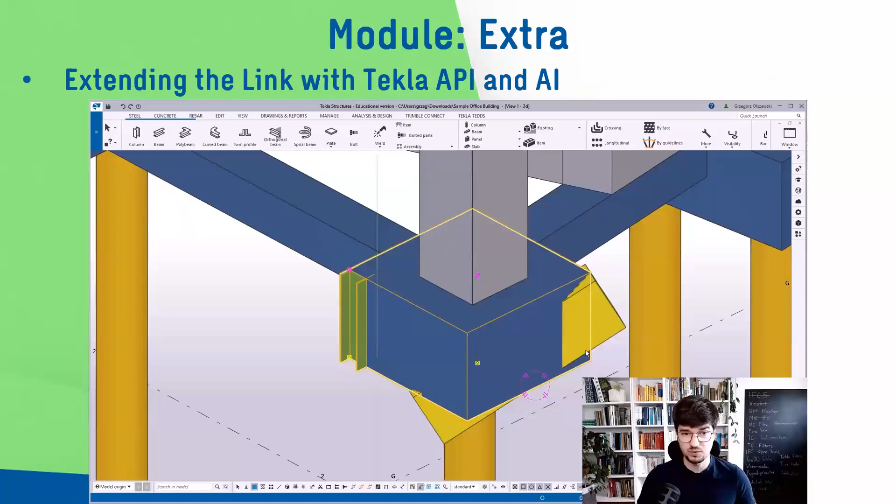And this year, we also added some extra modules. So for example, how you can use ChatGPT to write your own plugins and how to extend the possibilities. And this is working really good. We are showing step by step how with AI, without any knowledge about text-based programming, about Tekla Open API, you can really write your own new components, which is really great.

We also have prepared a whole extra bonus module about drawing link. So we are showing 61 lessons about drawing automation, how to automate the drawing production, dimensions, creating drawings, and make a quality assurance of that.